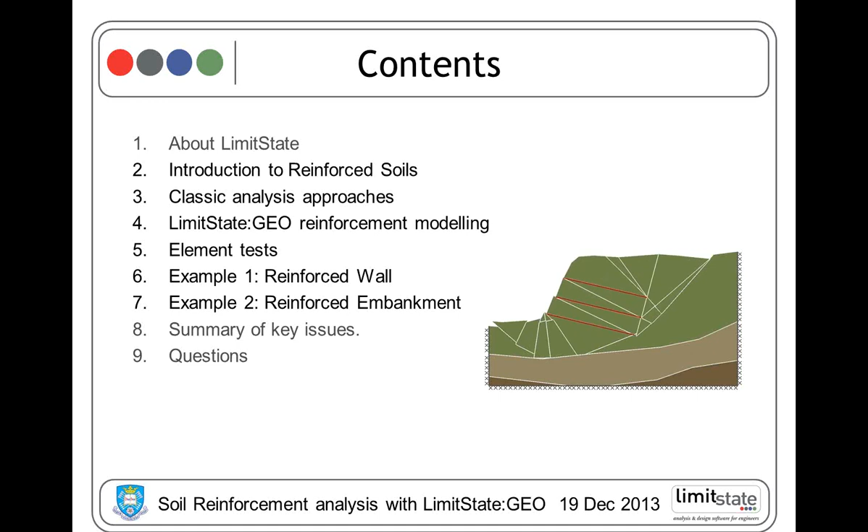So for those of you who are new to this webinar series, it's probably useful to give you some context of the software and the company Limit State. The University of Sheffield has been conducting research into limit state analysis and design and the use of optimization in civil engineering for almost 2 decades now. And Limit State was spun out from the university in 2006 with the aim of making this research available to industry.

Clearly, industry users want not only powerful tools but ease of use and support, which is exactly what Limit State can provide. Limit State also has sophisticated testing systems in place. That means every time the software is run, we run almost 1,000 tests automatically to make sure it still does what it's supposed to do.

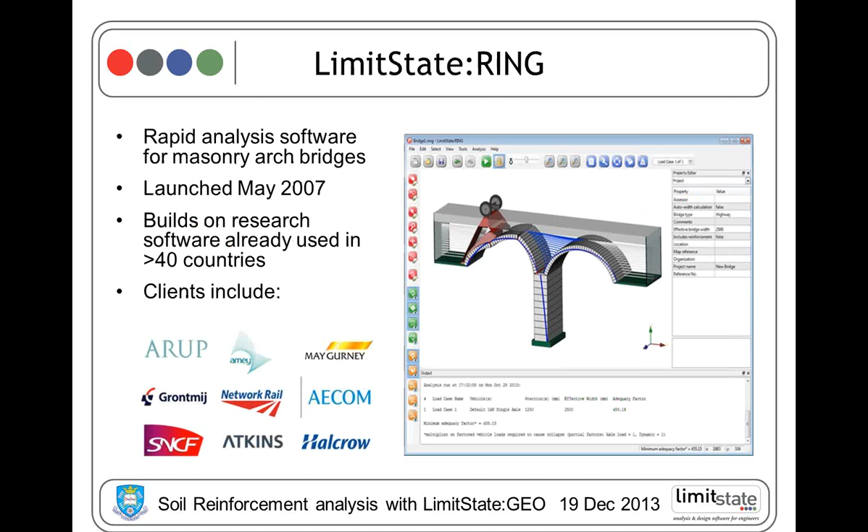The company has 2 products at present. First one is LimitState:RING, which is used for modeling masonry arches, and the second product is LimitState:GEO, which is the subject of this webinar.

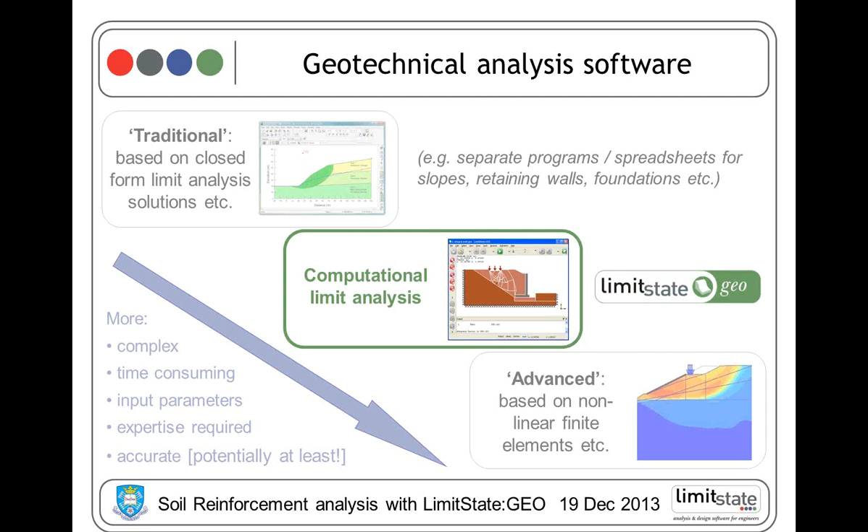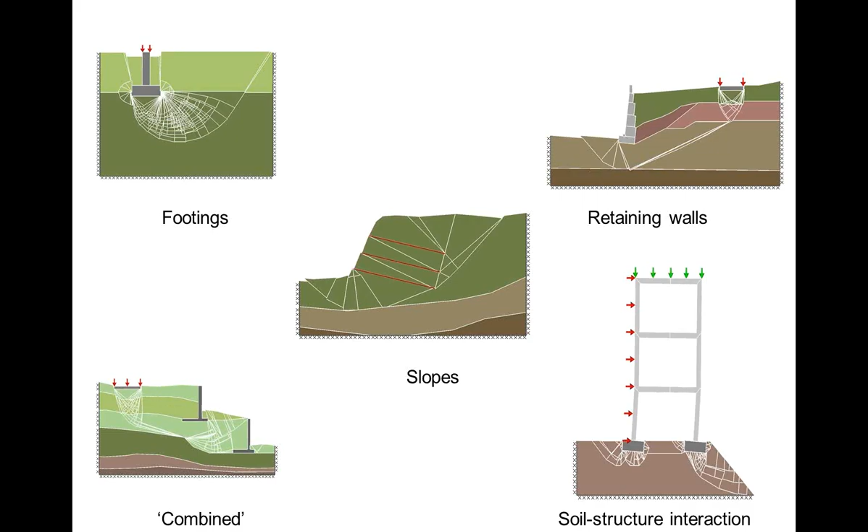Just a little bit of background to reinforced soils, to put in context how this is modeled in the software. Soil reinforcement can be considered to work by adding tensile strength to the soil. As we know, soil is fairly poor in tension, so it's a way of transmitting tensile stresses from one part of the soil body to another.

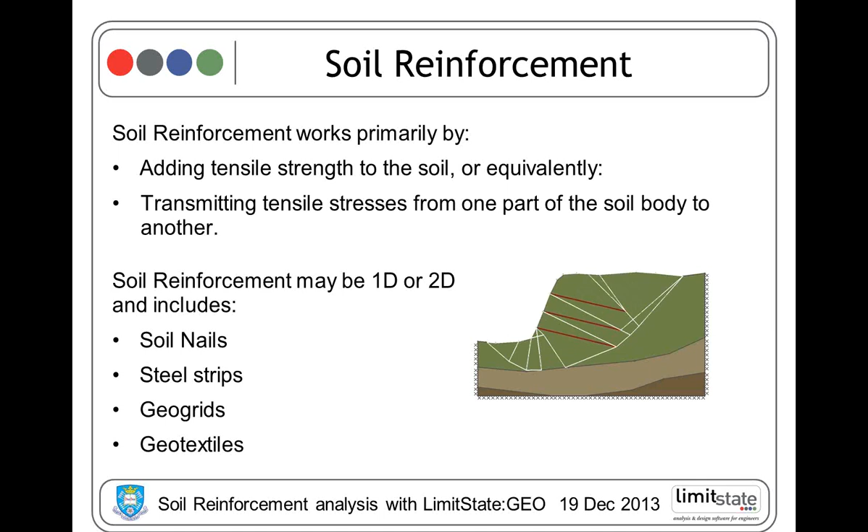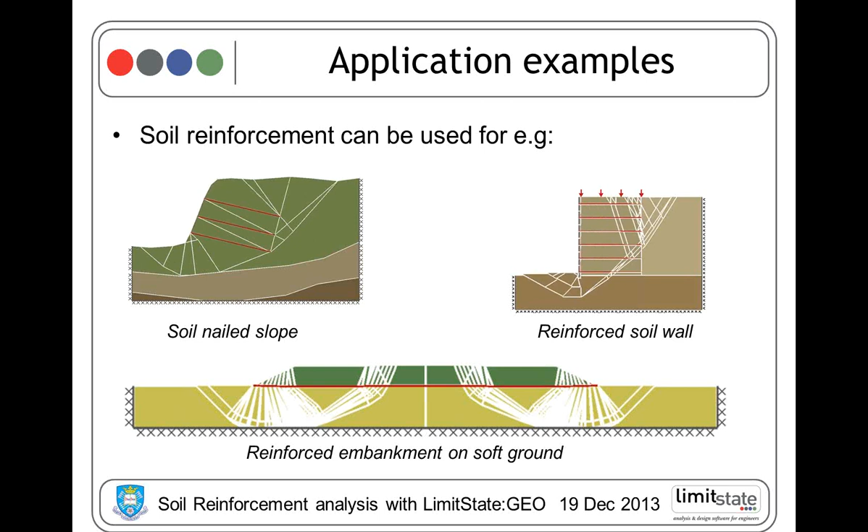So how are these types of problems analyzed by traditional classic approaches? We can use a number of methods, such as the method of slices for slope stability analysis, and we can try and apply that method to a reinforced slope.

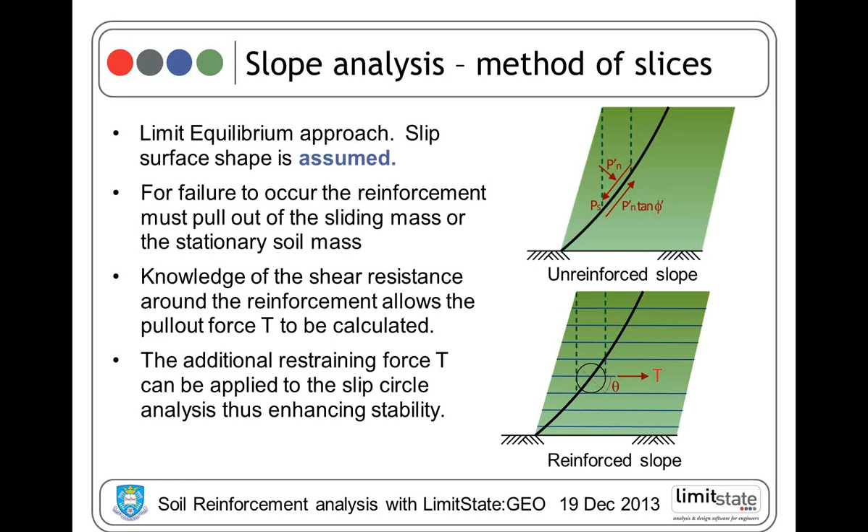An alternative method that's commonly used is one or two wedge analysis, where you're looking at a reinforced soil mass and consider a sliding wedge of soil. Again, if that sliding wedge or interface crosses the reinforcement, then in order for that wedge to slide, it's going to have to pull that reinforcement out. You can calculate that resistance and apply it to the sliding wedge, which again enhances the stability.

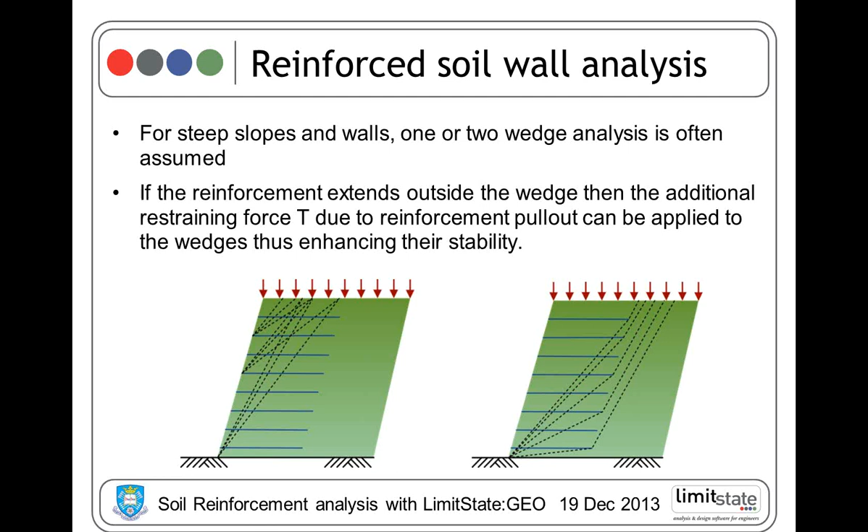So the key thing for us is, how is that restraining force calculated? At the basic level for undrained soils, if we have an element of reinforcement being pulled out through the soil, we might assume that the shear resistance on the interface is equal to alpha Cu, where alpha is an adhesion factor, which makes an allowance for the fact that sliding of the reinforcement on the soil is not going to give you the same shear resistance as sliding the soil on itself.

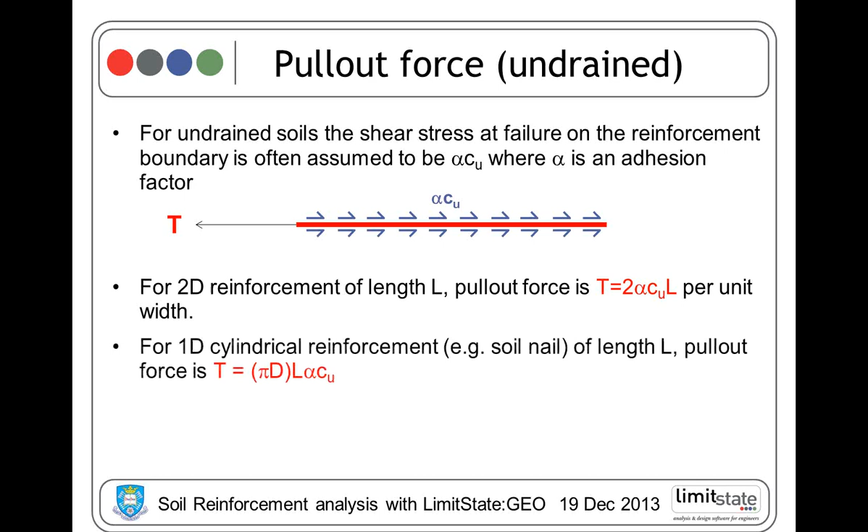For a 2D sheet-type reinforcement of length L, the pull-out force is 2 alpha CuL per unit width. The number 2 comes in because we've got shear top and bottom of the reinforcement surface. For one-dimensional reinforcement, say a cylinder, we take the circumference of the cylinder and again multiply that by alpha CuL to get the pull-out force.

So in both cases, if we were to write that in a very general form, we can say the pull-out force is equal to some constant Tc multiplied by the length of the reinforcement, and Tc depends on the geometry and interface characteristics.

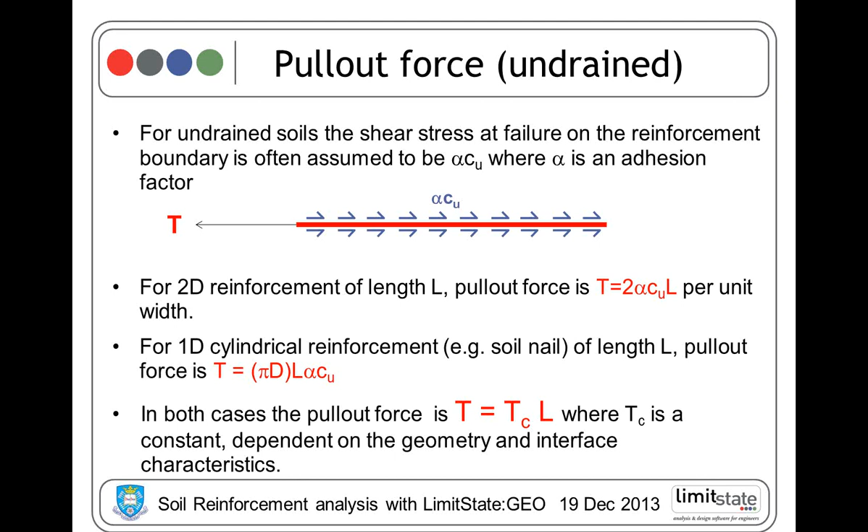For drained cases, it's pretty similar, except we've got a frictional interface, so instead of alpha Cu as the shear force mobilized on the interface, we've got alpha multiplied by the normal effective stress multiplied by tan of the angle of friction. Again, for two-dimensional reinforcement, we just multiply that up by the area, and for cylindrical reinforcement, we would multiply again by the circumference and the length.

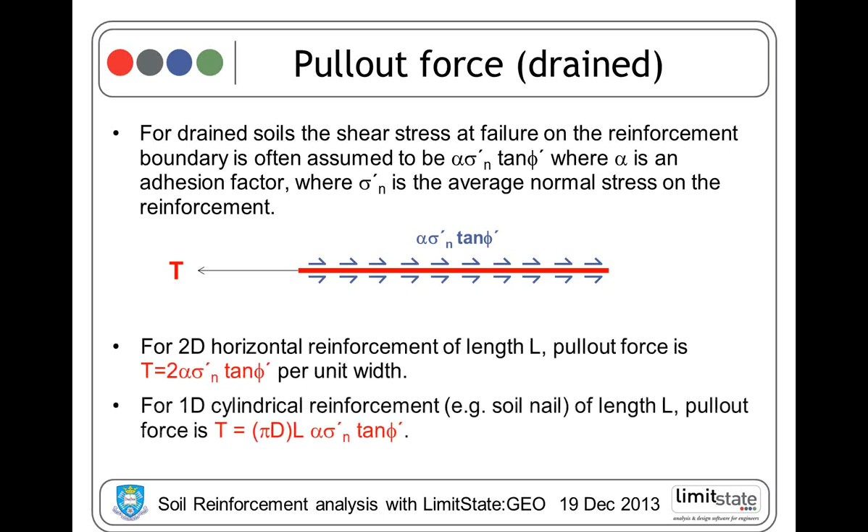Now, it's a little trickier for drained analysis because estimating the normal stress is a little more complicated. Quite often it's just assumed that normal stress is equal to the acting vertical stress, which may be calculated from simple statics, unit weight of the soil minus the pore pressure multiplied by the depth.

For a one-dimensional cylindrical reinforcement, this estimation becomes more complicated because the stresses are acting all the way around the cylinder, so they're not just vertical stresses, you've got horizontal stresses and so on. But there are various ways of trying to estimate what that would be, and that becomes a modification factor on the vertical stress.

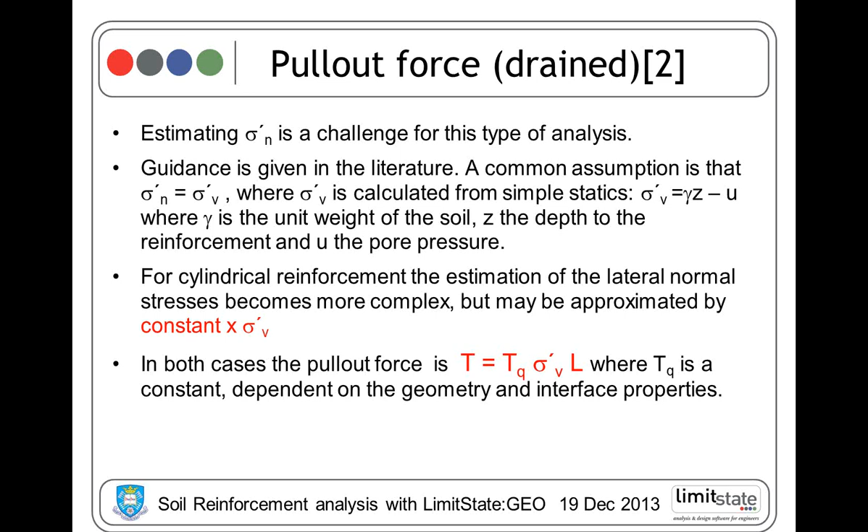So the upshot is that in many conventional analyses, the pull-out force is simply some constant, which we call TQ, multiplied by the vertical stress multiplied by length. These types of equations are essentially what we're using in LimitState:GEO to calculate the reinforcement interaction. We'll look at that in a little bit more detail.

Before we do that, it's probably worth recapping how LimitState:GEO works. If you haven't seen the explanation before, this will clarify how the LimitState:GEO software actually solves collapse problems. If you've attended any of the previous webinars, then this will be familiar to you.

The software uses a relatively new numerical technique called discontinuity layout optimization, which can be used to provide rigorous upper bound plasticity solutions. It's a direct way of analyzing the collapse state and came out of a 5-year research program carried out at the University of Sheffield, and the key publication which outlined the method was given in the Proceedings of the Royal Society in 2007, with a number of other publications since then looking at further developments of the method.

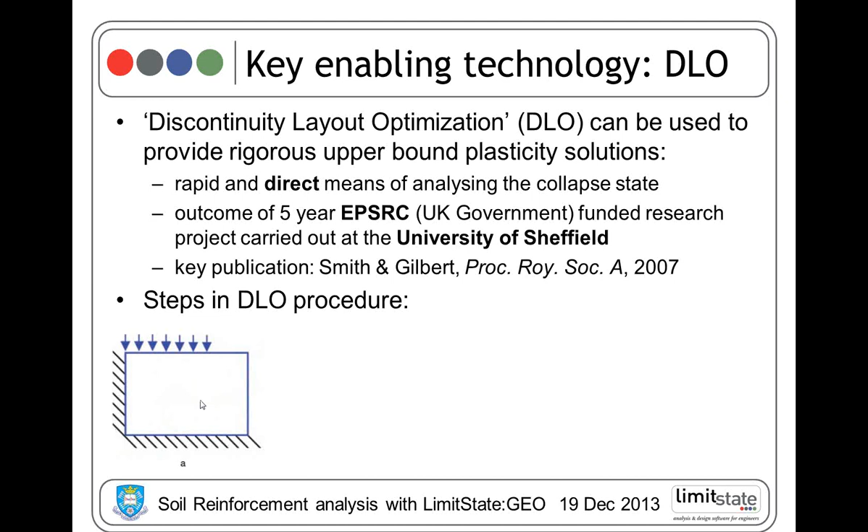In essence, it's quite simple to explain. What we do is, if we start with a problem which is the bearing capacity of a rectangular block of soil, so we have a load on the surface and a block of soil here. Instead of using elements as in the finite element method, we populate the problem domain with nodes. So here we've got 12 nodes. And then we connect every node to every other node with a potential slip line.

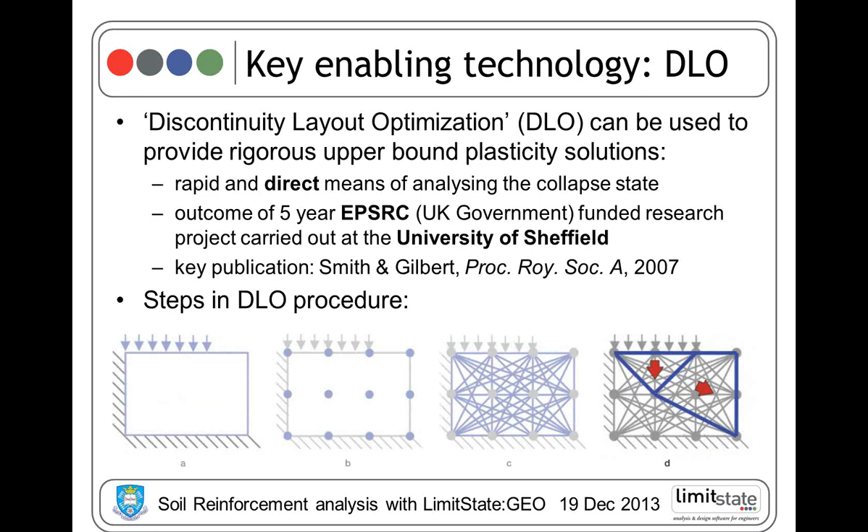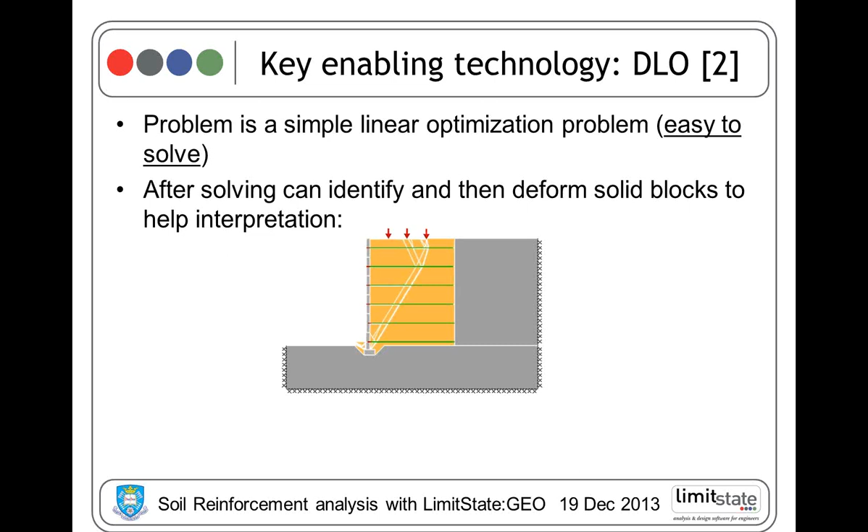The key point to bear in mind is that increasing the number of nodes in the problem allows more potential slip lines, and a more precise mechanism to be identified.

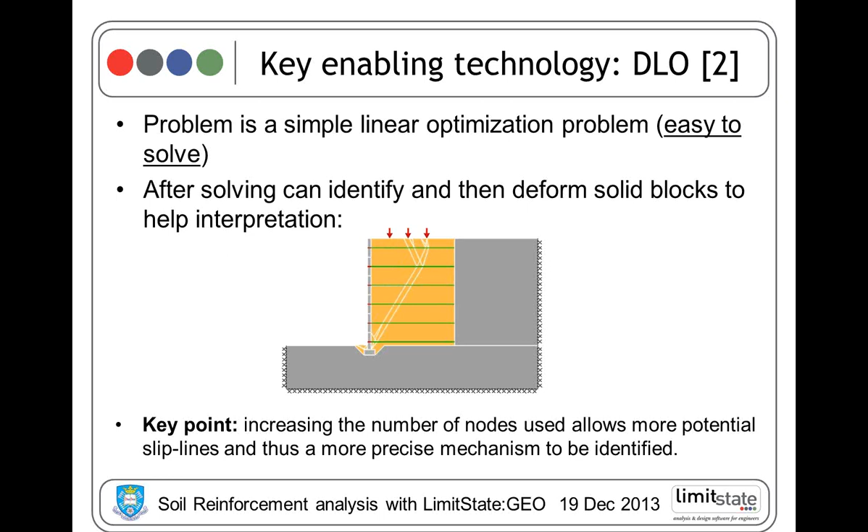So just picking up more detail about how this would work with soil reinforcement. If we're going to model reinforcement in the software, and this reinforcement in this diagram is represented by these green lines, then what we see in this collapse mechanism is that we have not just one sliding wedge, but several sliding wedges, and different relative movement between the soil and reinforcement in different places.

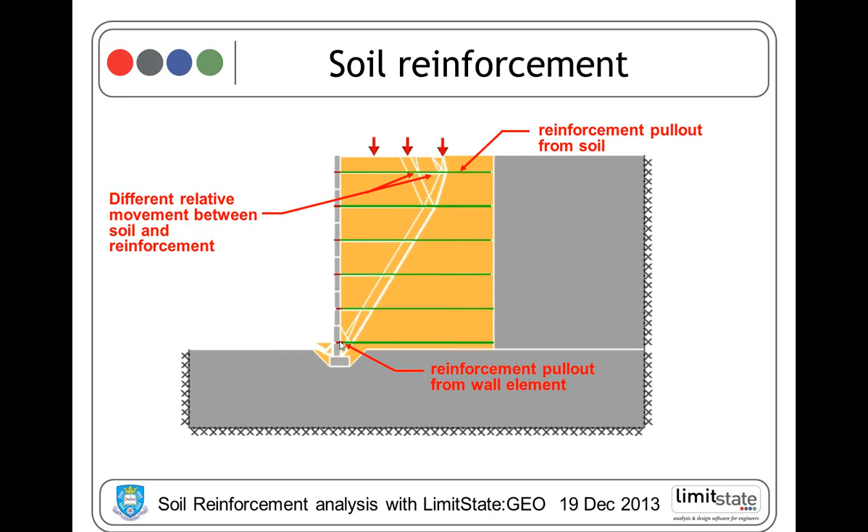It's not as clear-cut as in conventional analysis, where we have perhaps one length of reinforcement which is pulling out and another length of reinforcement staying embedded in a sliding mass. We could have relative movement right across the board, so we have to be able to model that. In this particular case, we've got more complicated behavior near the top of the mechanism. We have straightforward pull-out at the top here on the right, and at the base here we've actually got the reinforcement pulling out of a wall element. But we need to be able to capture all of this in a very general way.

So what the software does is it doesn't try to separate out lengths of reinforcement which are pulling out from lengths which are staying embedded in soil and are stationary. It just simply says what is the relative movement of the soil with the reinforcement at any local point. So here we've got an example of a wedge of soil sliding down past a piece of reinforcement. There could be many of these sliding in different ways relative to that reinforcement.

If we know the relative movement, we can calculate the limiting shear force applied to that reinforcement element over that short length, and carry that calculation through to a force taken by the reinforcement. That would be calculated using this equation, the second equation there, which is essentially using these parameters TC and TQ that I referred to earlier on. That allows us to produce a very general implementation of soil reinforcement interaction.

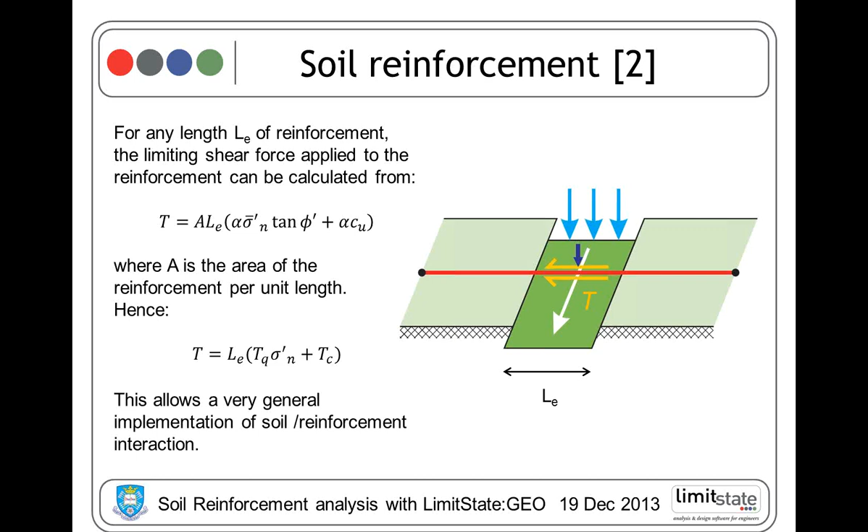So how does that work? Well, it's probably useful to look at some simple element tests to illustrate these principles in a bit more detail. So what I'm going to do here is escape from that software, and we're just going to run an example, run the software now, which is this one.

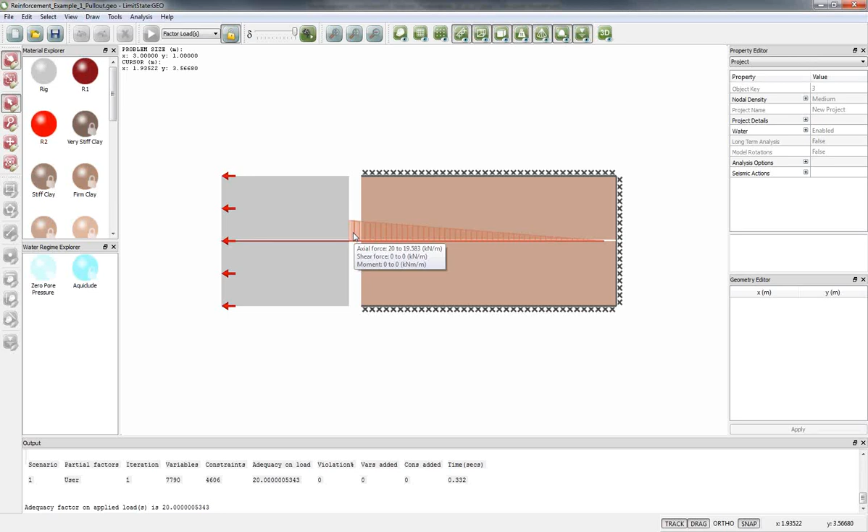The software can also be set up to plot axial force, shear force, or moment in any engineered element. For soil reinforcement, we're generally interested in the axial force. It's showing, as we'd expect, that the axial force is 0 at this end, and slowly builds up all the way to 20 at this end as the shear force from the soil is applied to the reinforcement along its length.

Now, just to be clear, let's run through a few more examples. I'll change the property of that reinforced element. As I said, I can access it by clicking on it directly, but it's also defined by this material R2 here, so I can click on that material directly and see its property there, which is 10.

So if I increase its pull-out factor to 20, then of course we would expect the pull-out force to go up to 40. It's 2 meters long as before, so it's 2 times 20. And as we expect, we get 40.

I'll increase its pull-out force to 100 now. So we'd expect to get an answer of 200. We in fact get an answer of 120. The reason for that is, of course, that the engineered element cannot pull out with a greater force than can be sustained in shear by the surrounding soil.

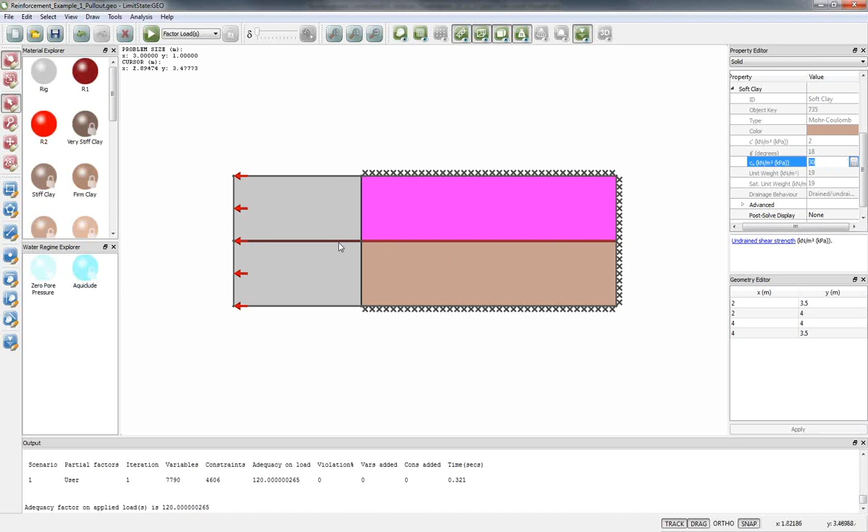If I click on this block of soil, the properties appear here, and we have a material there called soft clay, and that clay has an undrained shear strength of 30. So it's not possible for that reinforcement to pull out with a force greater than the resistance that clay could provide if that reinforcement was a sheet. So it's limited by that value of 30 multiplied by the length 2 and multiplied by 2 because we could have shear top and bottom. So there is a limit there, but generally you will be setting this value lower than for one-dimensional reinforcement, lower than an equivalent sheet would be.

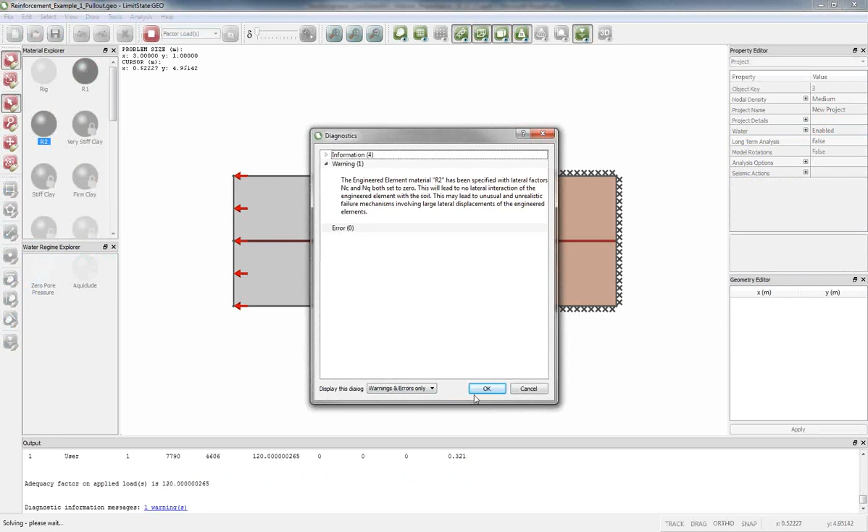So I'll change that back to 10 and we'll run that. So we get back to 20. The other thing to say is, of course, that if the reinforcement has a strength lower than 20, then it will actually rupture. At the moment, we've set the rupture strength of this reinforcement to 1 times 10 to the 30, which is effectively infinity.

If I set that to 10, we should find that the reinforcement will fail in rupture before it can mobilize the full shear resistance. And here you can see that we've got a result of 10 now, and that this shear force is building up to a maximum of 10 at this point. The way that's represented in the animation is basically the reinforcement just stretches.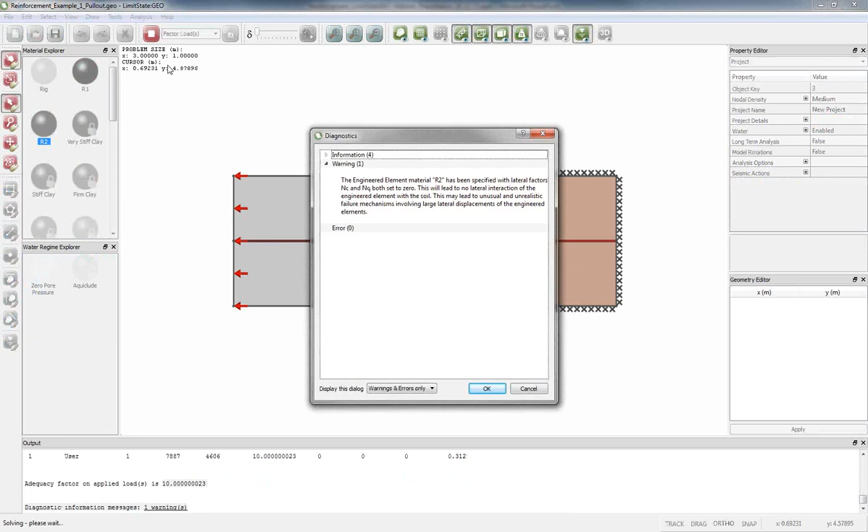Whereas previously, if we looked at the animation, if I change this strength back to something very large, you can see that the reinforcement pulls out of the soil at this end. So in the animation, it will indicate whether you're getting pull out, so you can see a gap forming at this end, or whether we're getting rupture, which is effectively represented by the reinforcement stretching in the animation. So that's a representation of the pull-out force.

I'll just touch on one other property of these engineered elements, which are not typically used in classic analysis. If you have a one-dimensional element such as a soil nail, and the soil is moving past the nail laterally, then there might be a lateral resistance, in the same way that you get a lateral resistance of a pile. So you can specify that in this particular problem.

If I click on this item here, we have what's called a lateral factor, which effectively works the same way as the pull-out factors, except it responds to lateral force. So this is basically saying that for soil to move past this reinforcement laterally requires a force of 25 kilonewtons per meter length of the reinforcement.

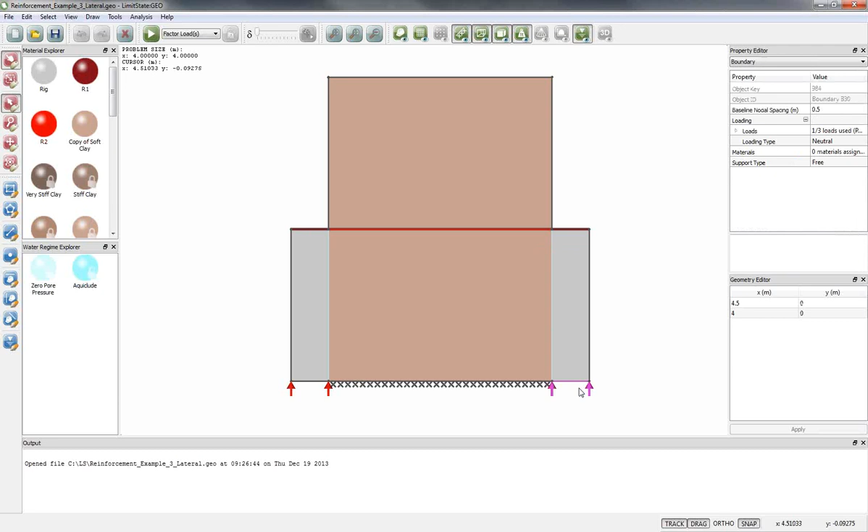This element test here is simply set up as a little jig with some rigid elements to apply the forces, and we're asking the software what do we have to multiply these unit forces by to cause collapse. So we run that problem and we get an answer of 75 in this particular case.

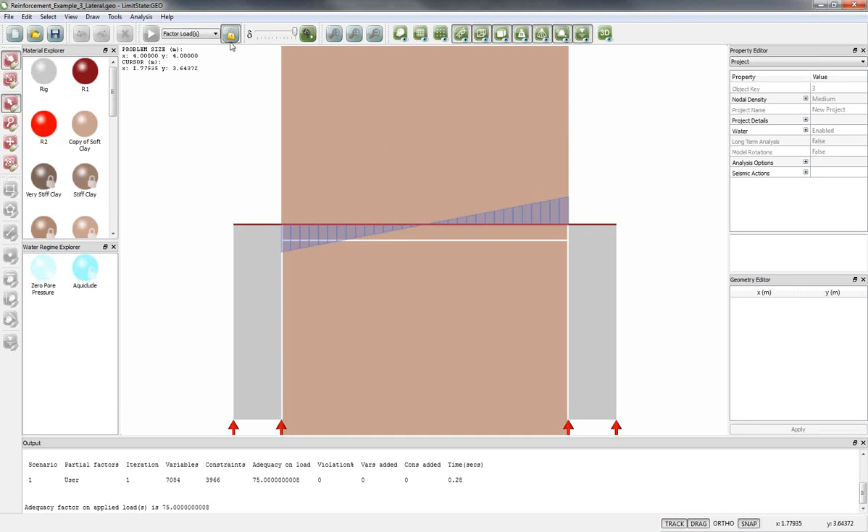This element is now moving sideways through the soil. We're plotting shear force in the element here, running from 37.5, minus 37.5, to 37.5 at the other side, which is basically equivalent to that overall force of 75. And why is it 75? Well, if we look at the reinforcement, it's modeled from coordinate x 4 to 1, so that's 3 meters long, and we had specified a lateral resistance of 25.

So it is possible to model lateral resistance. It's not necessarily typically used in conventional analysis, so you can simply set those values to 0 to eliminate that process. We actually recommend setting that to a very small number like 0.1, simply to stop occasional anomalous results where if the reinforcement isn't asked to do anything and has no lateral resistance, it could simply float out of the soil. A very small number there will just prevent that happening.

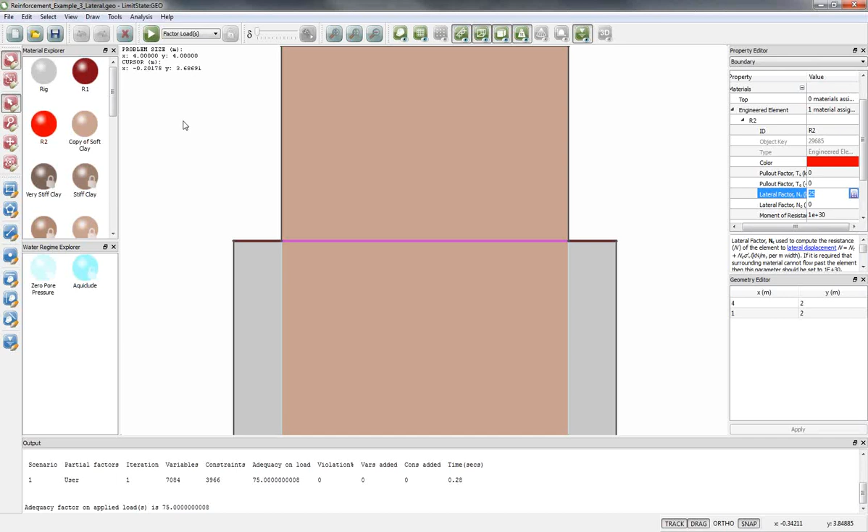So that's the element test. So how do we actually apply that to an actual problem? I'm going to jump back to our PowerPoint presentation.

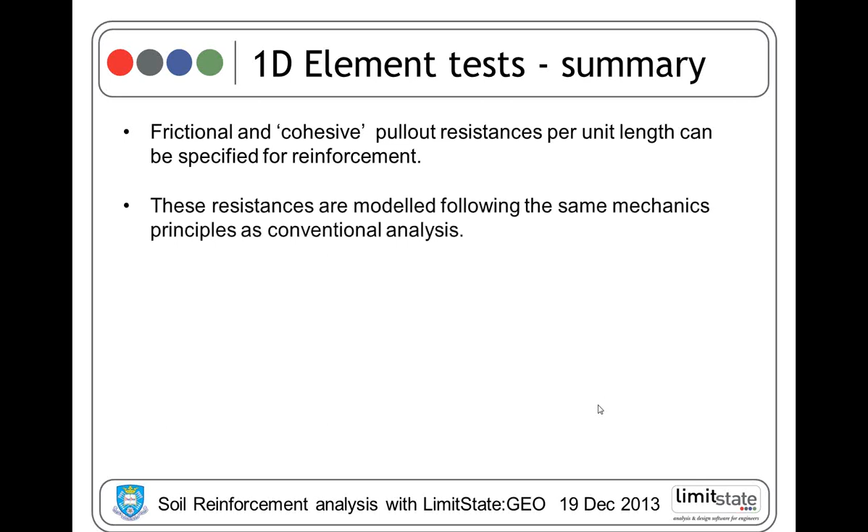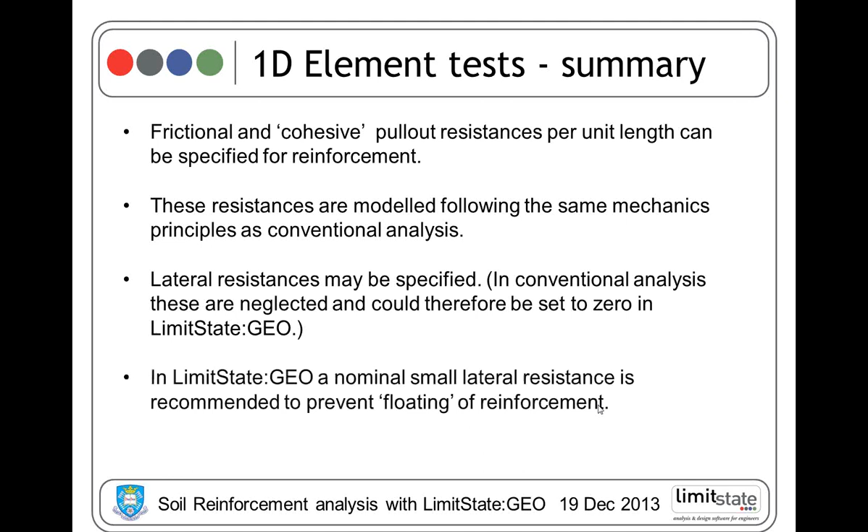Just a quick summary of what we've covered. We can model frictional and cohesive pull-out resistances per unit length. We looked primarily at the cohesive ones, but the frictional properties can be put in and work in conjunction with the nominal vertical stress, following pretty much the same mechanics found in many conventional analysis techniques. We can model lateral resistances, but you may wish to set those to 0, or to a very small value just to prevent floating the reinforcement, and we can specify tensile rupture strengths for reinforcement.

So we'll jump back to the software and that model. Here we've got the limit state model of that diagram I just showed you. If we click anywhere here, we get the soil - you can see it's got a C dashed of 2.5 and a phi dashed of 26 degrees. And the reinforcement nail, if I click on that, you can see it's got a pull-out factor of 1.96 for the TC value, and TQ is 0.383.

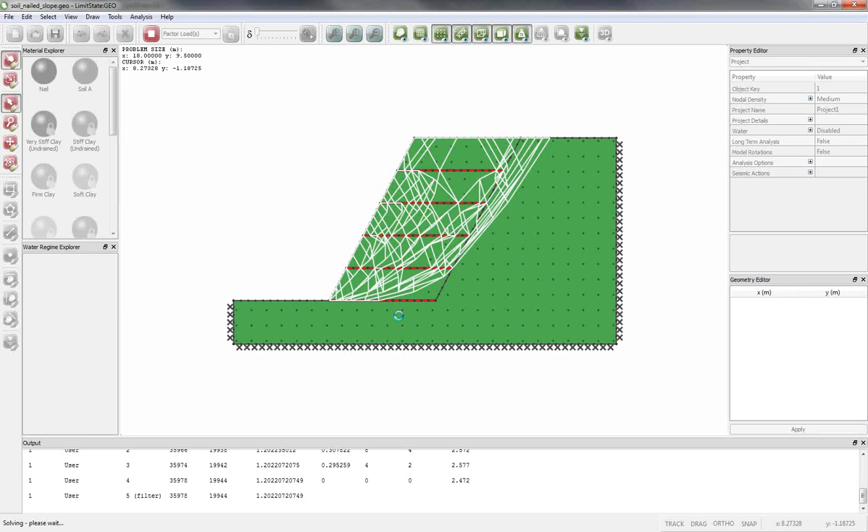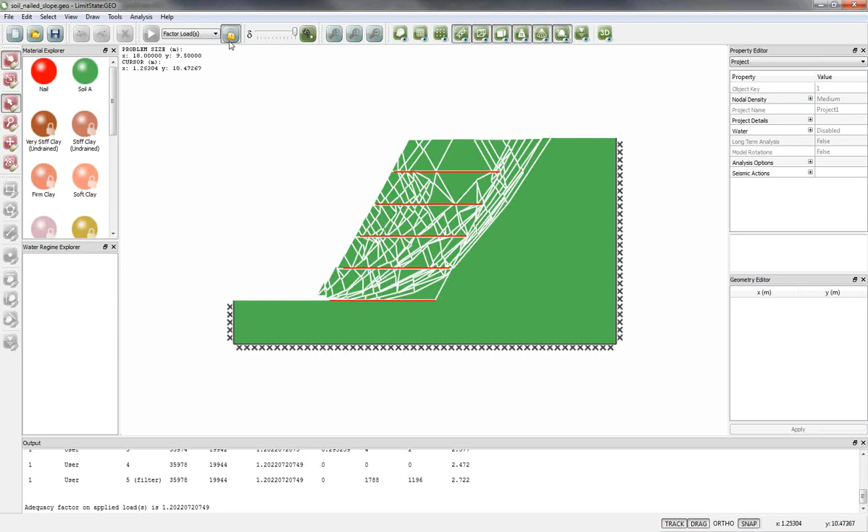So if I run that analysis, I get a particular collapse mode, and you can see there's a lot of sliding wedges in between the reinforcement, but the overall shape is pretty much like a two-wedge analysis - the software is finding the critical collapse mode in that case. We can do things like changing the length of the nails, so I can shorten these down, perhaps to see what effect that has.

And if I solve that, we'll get a somewhat different collapse mode.

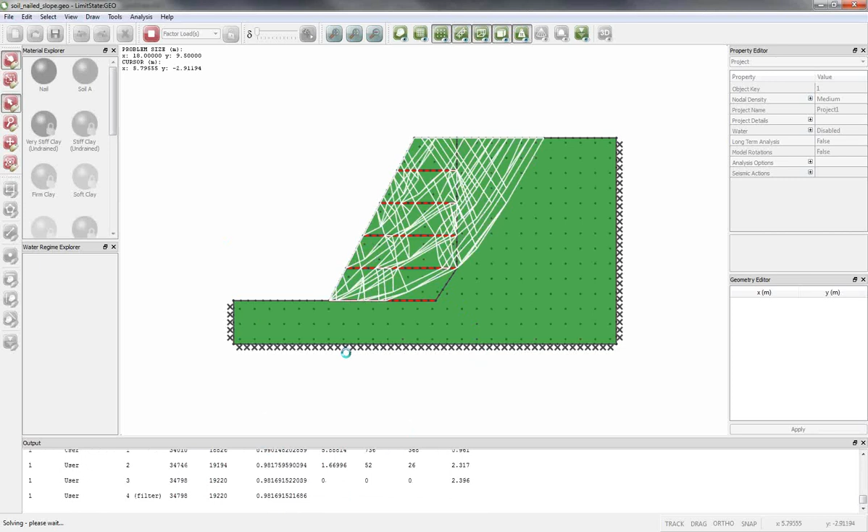What I'm doing is asking the software for an ultimate limit state analysis process, and we've gone into this in more detail in previous webinars. Essentially we're asking the software, what do I have to do to this system to cause collapse? We can ask that in two ways: how much do I have to increase an existing load in the system to cause collapse, or how much do I have to reduce the strength of the soil to cause collapse.

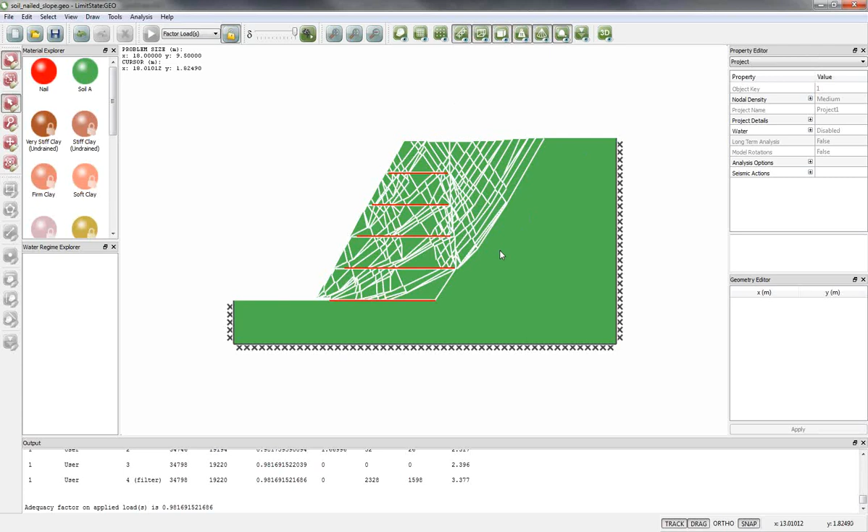In this case, we're asking how much do I have to increase the unit weight of the soil by to cause collapse. What the software is saying is you have to multiply the unit weight of the soil by 0.98 in this case to get a collapse mode, which means this system is pretty much on the point of collapse. Before I shortened those soil nails, we had a factor of 1.2, meaning we had to multiply the unit weight of the soil by 1.2 to cause collapse.

Further details are in the manual on how you define what you want the software to scale to cause collapse, but you can choose any load or any combination of loads, or specify that you want strength factoring.

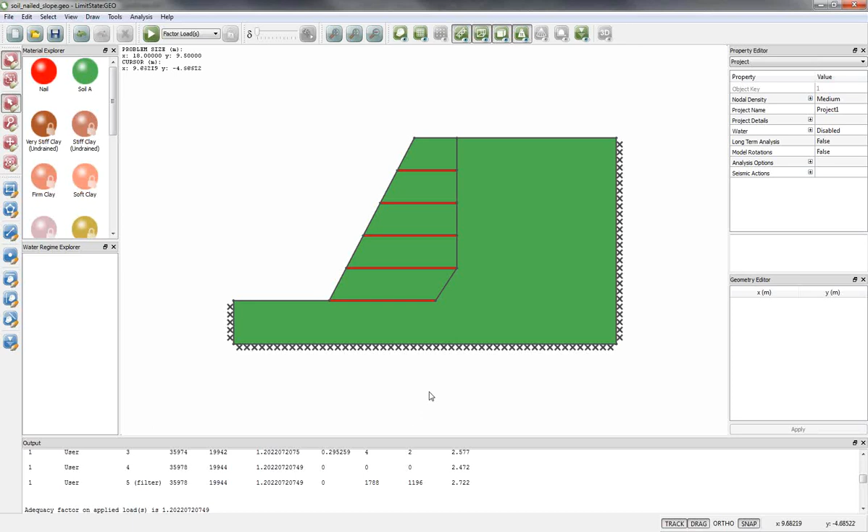So that's a brief look at modeling the soil nails and how they interact, and how that interaction changes, but certainly it increases the stability of the system.

If we jump back to the presentation, in that paper by Clarke et al., first of all we looked at modeling, comparing the DLO analysis, or limit state geoanalysis, with a two-wedge analysis. First, just to check that it did work validly, the DLO analysis was set up so it was forced only to model two wedges. Normally, as you've just seen, it will model hundreds of wedges, but you can force it to only model two. That was compared with a classic hand calculation using two-wedge analysis.

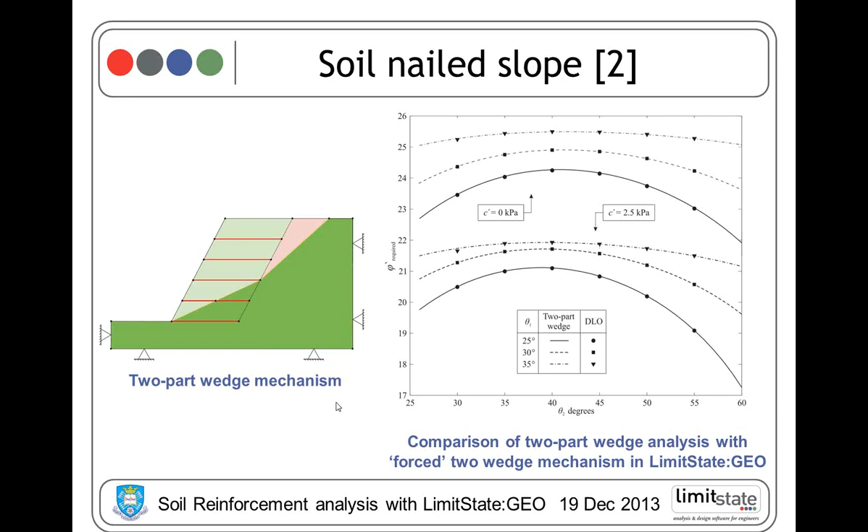This graph shows a comparison. The curves are from the traditional two-wedge analysis hand calculation. The individual data points are from the DLO analysis, and you can see they exactly match up. So that indicates the reinforcement modeling is doing exactly what it should do.

If you then allow the software to pick whatever collapse mechanism it wants, what you find is, comparing this first graph, which shows the required friction angle for a given length of reinforcement just to avoid collapse, this is what a two-wedge analysis would give you. The software is finding more critical mechanisms, so it's saying this is a bit over-optimistic, and really you need a slightly stronger soil to prevent a more refined, more critical collapse mechanism than the simple two-wedge approach.

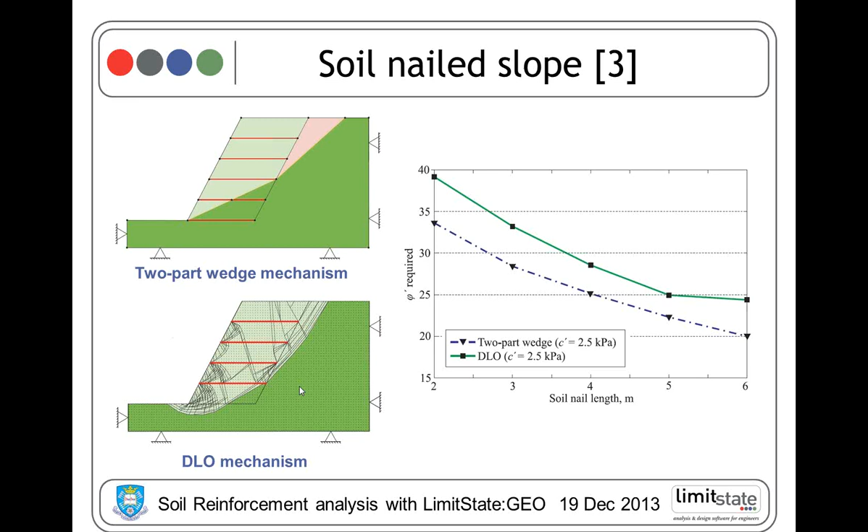So what the software can do is essentially seek out and find the most critical collapse mechanism. It's not restricted to two-wedge or one-wedge or whatever. It will find whatever mechanism it can construct out of slip lines joining the nodes you've specified. You can see in this diagram there are a very large number of nodes, so the software can pick out some very fine mechanisms. It will find internal failure if that's critical, external failure if that's critical, or any combination.

So in summary, if we're modeling one-dimensional reinforcement like soil nails, the implementation in the software allows soil to flow past the reinforcement. It doesn't behave like just putting a sheet in the soil. Soil can flow past the reinforcement, but the reinforcement can still take some of the tensile forces through the soil. It's been calibrated against two-wedge analysis, and the recommended approach to modeling 1D reinforcement is to use engineered elements, calculating Tc and Tq pull-out values and entering those.

You may specify lateral coefficients if you wish, but they may be set close to 0, and you would specify a tensile rupture strength as appropriate. Generally, as we showed earlier, you can set boundary materials above and below the element, but they were not set in this particular case, so normally we just leave those empty. That's modeling 1D reinforcement, and the way the formulation works, as I've said, is that it allows the soil to flow past the reinforcement.

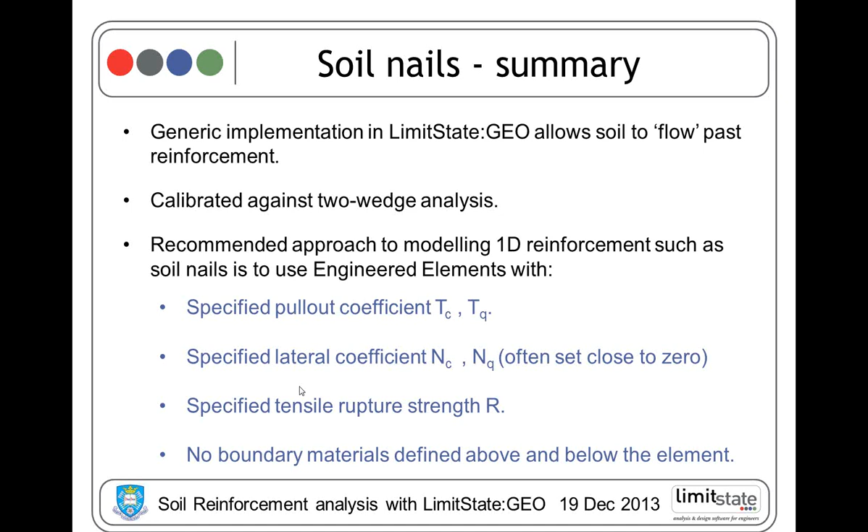If we're going to model two-dimensional planar reinforcement, like sheets of geotextiles or geogrids, generally the soil is not going to flow through the reinforcement, and we are more concerned that we might have sliding above the reinforcement or below, and that may be the same amount of sliding above and below, or it may be different. So we take a slightly different strategy in this case.

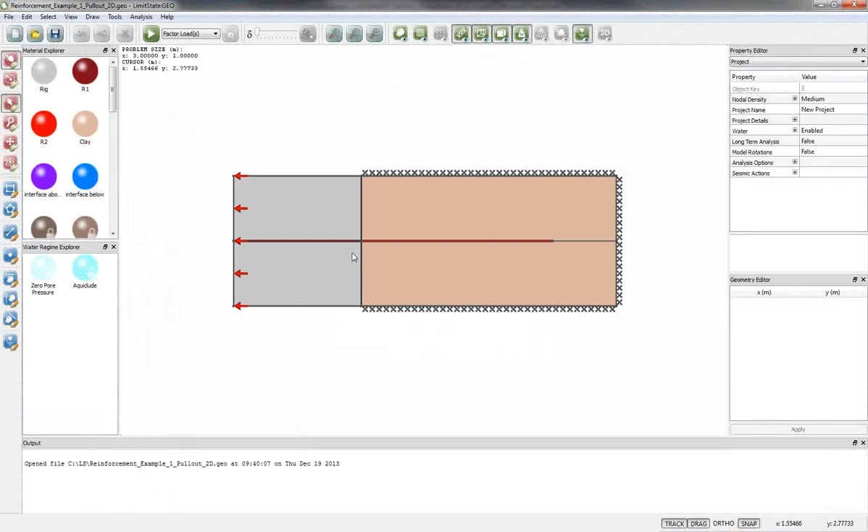I'll jump back to the software to look at how we deal with that particular case. Here we have an example very similar to the previous one. We've got the same block mechanism on the left to allow us to pull out this length of reinforcement. This time this reinforcement has a length of 1.5 meters.

We have this engineered element, and this time I'm setting the pull-out factor for TC to be a very high number, effectively infinity. I can set both TC and TQ to infinity, or just TC, it doesn't matter, they will override effectively to infinity. I'm setting the lateral factor to infinity, and normally we would set the moment of resistance of the material to 0, meaning we're modeling it as a very flexible material with no bending moments, free to bend as it likes. The rupture strength here we're setting as infinity for the moment. What we want for this engineered element is, if we're modeling it as a sheet, the fact we've set the lateral factor to infinity prevents soil flowing through it.

The fact that we set the pull-out factor essentially locks it to its top and bottom interface materials, and so we allow all the interface action to occur through those.

At the moment we don't have any material assigned, so I'm going to assign a material that relates to the surrounding soil. This surrounding soil is a clay soil, with an undrained shear strength of 50.

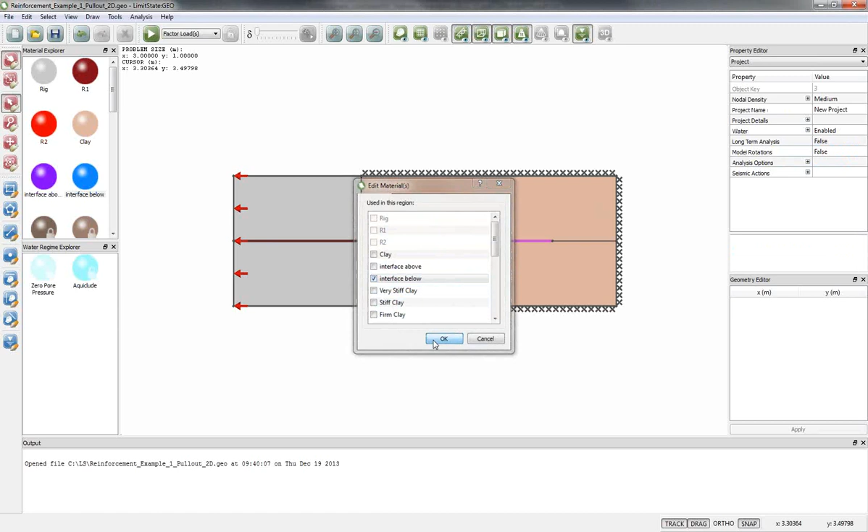So I'm going to click on this bottom element and assign the interface below material. If I zoom in on the element, you can hopefully see it's got these 3 colors on it: the interface above material, the element itself, and the interface below.

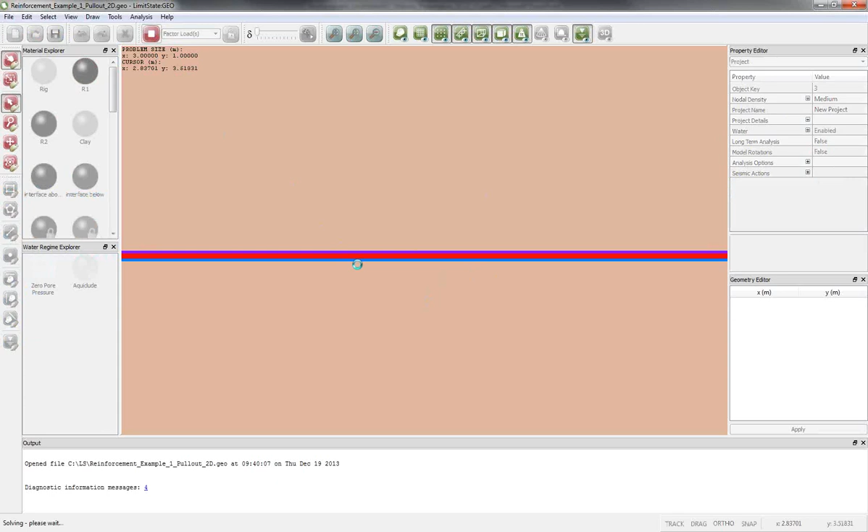What we've done by setting the pull-out resistance of the element to infinity is we've locked it to those interfaces effectively. So when I run that problem, the reinforcement is going to slide on those interfaces and be pulled out as before.

This time I'm getting an axial force of 112.5. Now the original clay had a strength of 50, and I've applied factors of 0.9 above and 0.6 below, so on average that's 0.75. Effectively per unit length I've got 37.5 applied to that.

And the length of the reinforcement is 1.5. So if we factor all those numbers in together, then we end up with this load capacity of 112.5.

It's perhaps easier if I were to set these values to say 0.5 and 0.5 above and below to a half. So effectively we've got half the interface friction above and below, and we run that problem.

So if I have half the interface friction above and below, I've got 25 above, 25 below, and a length of 1.5. So all multiplied up comes up to 75 for my pull-out load.

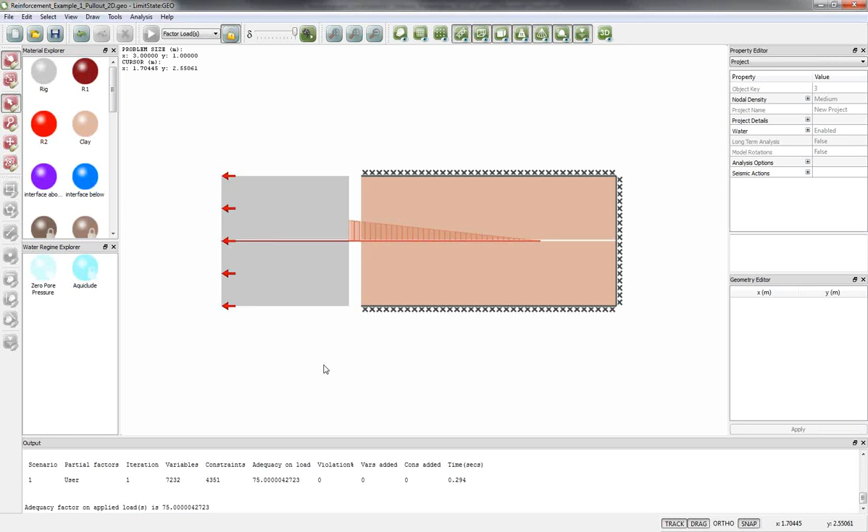So we can set the planar reinforcement interaction in a different way. This way, the rupture strength still behaves as normal. If I set the rupture strength to say 24 for this material, then of course it will rupture at a strength of 24 rather than 75 in this particular case.

So I get a result of 24. So the software will allow that rupture to occur.

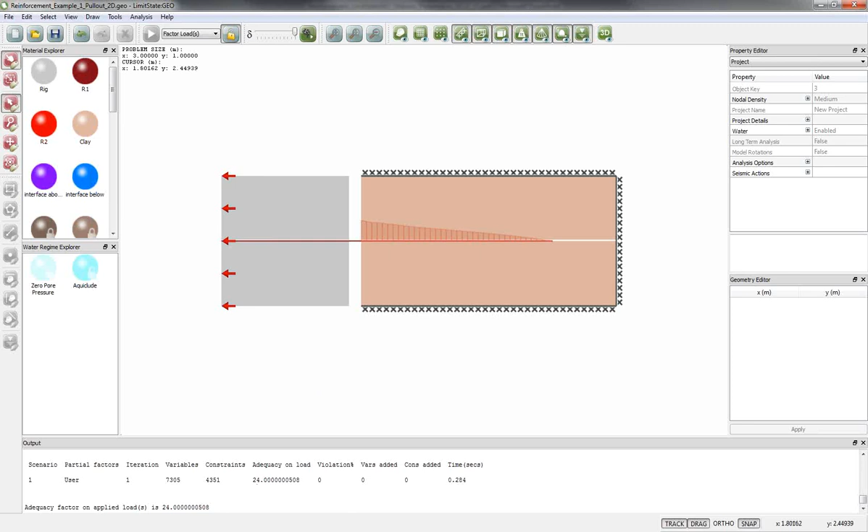So that's a brief overview of modeling planar reinforcement, and if we jump back to the PowerPoint.

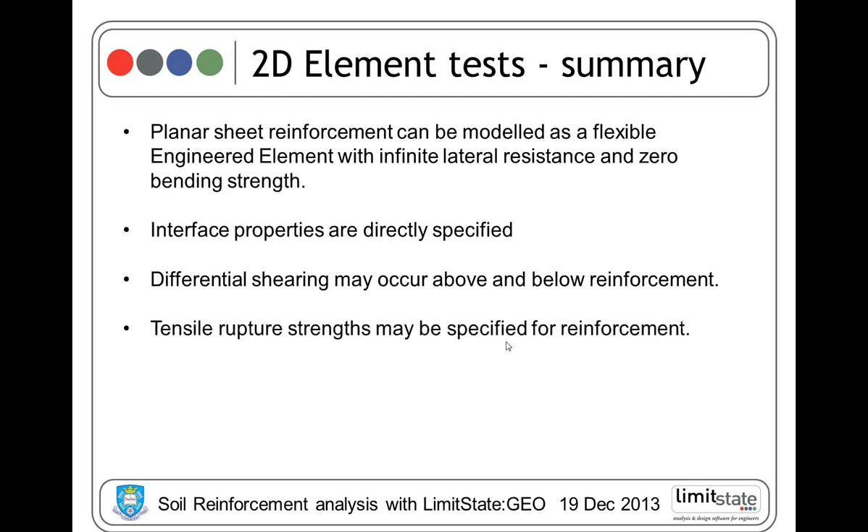In summary, we can model it as a flexible engineered element with infinite lateral resistance and zero bending strength, and we just specify the interface properties directly. And that allows differential shearing above and below the reinforcement. And again, we can specify tensile rupture strengths.

So we'll finish off this webinar by looking at a reinforced embankment. Often if you're going to build an embankment over soft soil, you'd use reinforcement between the embankment and the soft soil. And there might be a whole range of questions: What slope angle can you have on the embankment? How strong should the embankment soil be? How high can you build the embankment? What's the required rupture strength for the reinforcement?

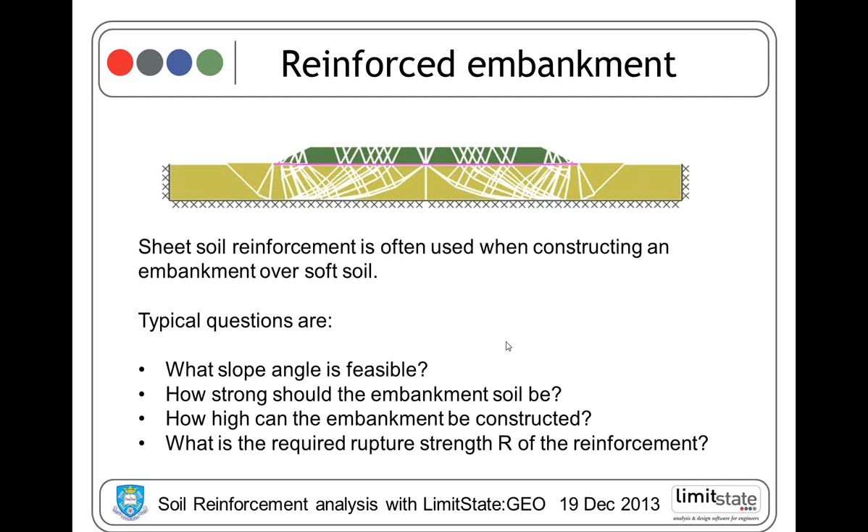So we'll just jump to the software again and look at an embankment model. So here we're modeling half an embankment. We've got a symmetry line down the middle. We're modeling the embankment material as a granular frictional material, friction angle 32, C-1/2, and we're modeling the base soil

here as soft soil. It's got an undrained shear strength of 16. The geotextile itself, we're modeling all those coefficients, lateral and pull-out forces, as infinite effectively, so they're locking themselves to those interface properties, zero moment of resistance and a rupture strength of 25 to begin with.

And this element itself has top and bottom materials. The top boundary is defined as having an alpha factor of 0.8, so that's 0.8 of the strength of its parent material, which is the overlying sand. And the bottom boundary, again, we've got 0.8 of its parent material, which is the underlying soft soil.

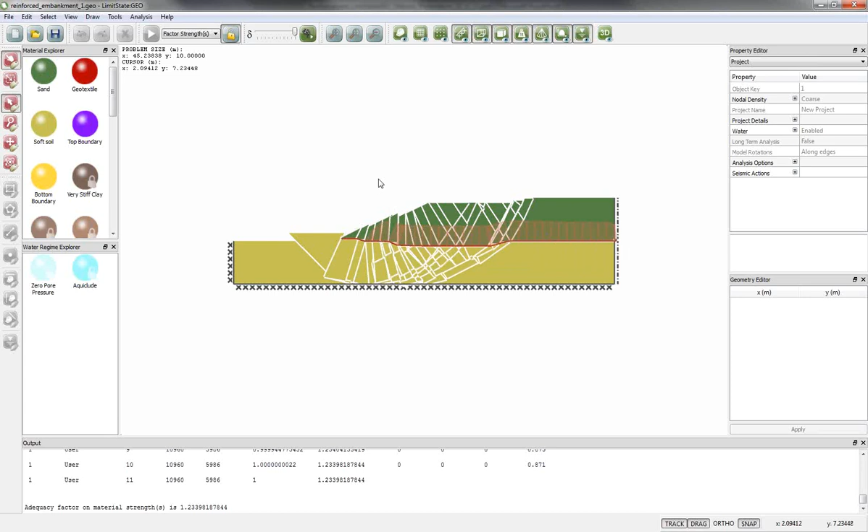And we've compared this with sort of slip circle method of slices approaches, and we get very similar answers in this case. But what the software is able to do is obviously pick up different types of failure modes.

So if, for example, we made the rupture strength of the reinforcement much higher, put that to 250, really effectively way beyond its failure, then we can get different failure modes. So by making that much stronger, what we find is that once the software has found the critical failure mode for

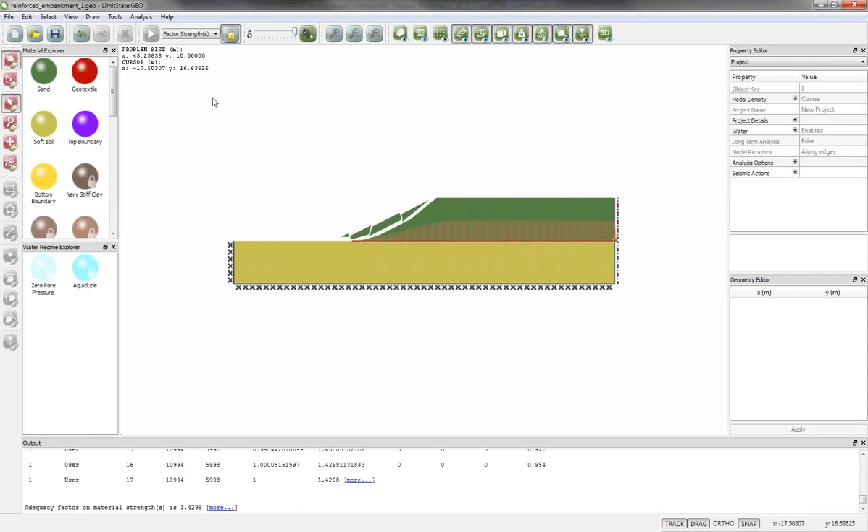factoring strength, we just get a simple slope failure in the embankment. So the software can identify those failure modes.

But additionally, supposing the soft soil was even softer, just for the purpose of illustration, I'll half that strength. The software again can find different failure modes.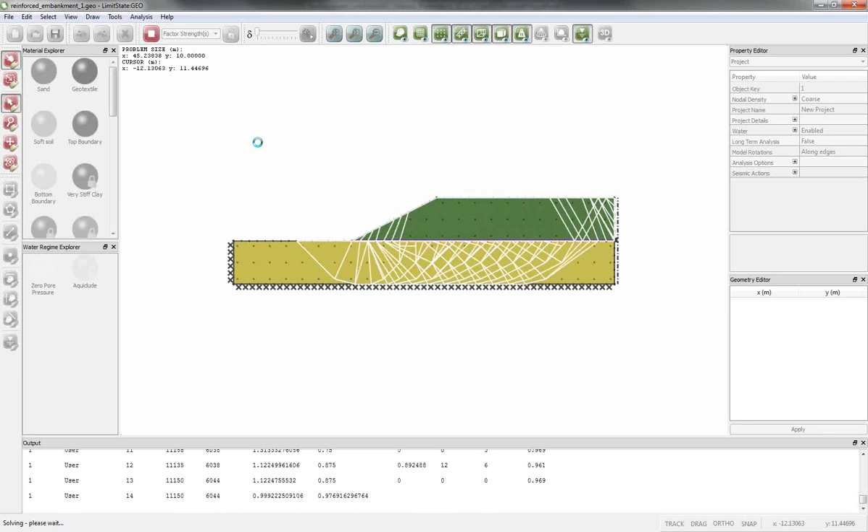So in this case, it's finding a collapse mode, which is effectively squeezing the underlying clay, and the embankment is in effect snapping itself down its middle and rotating into that clay, as we'll hopefully see in the animation. So again, hopefully this shows the power of the software to find the critical collapse mechanism. It's not restricted to predefined modes.

And generally it's finding more critical mechanisms that a slip circle method would find.

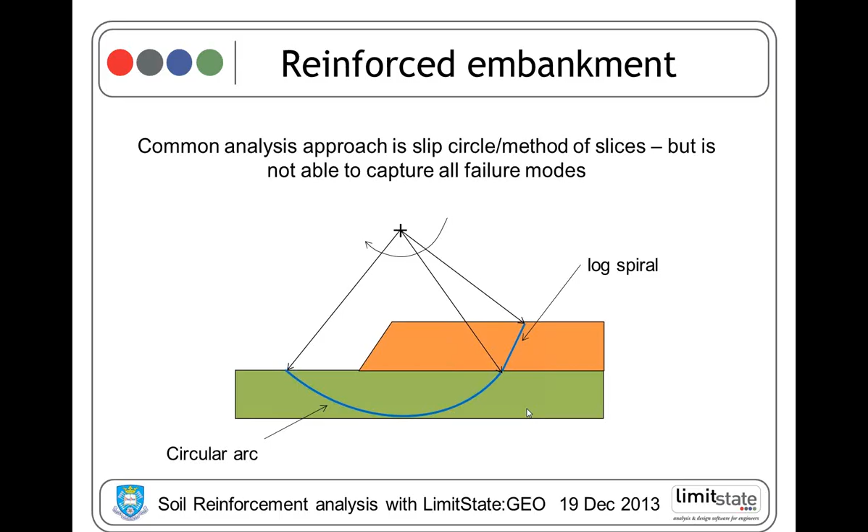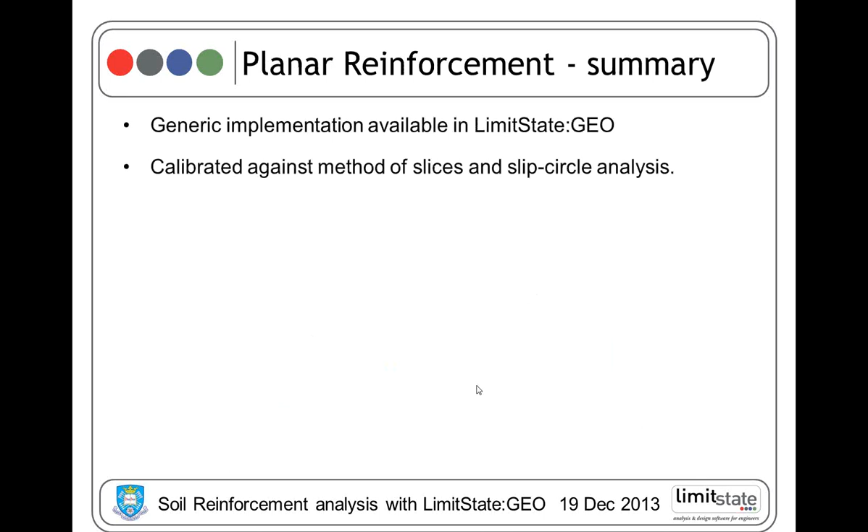So to wrap up, in terms of planar reinforcement, we've got a generic implementation available in the software. We've compared it against method of slices and slip circle analysis, and the recommended approach is to set the pull-out and lateral coefficients to infinity, specify tensile rupture strength, and define the use of boundary materials above and below to effectively implement the alpha interface factors.

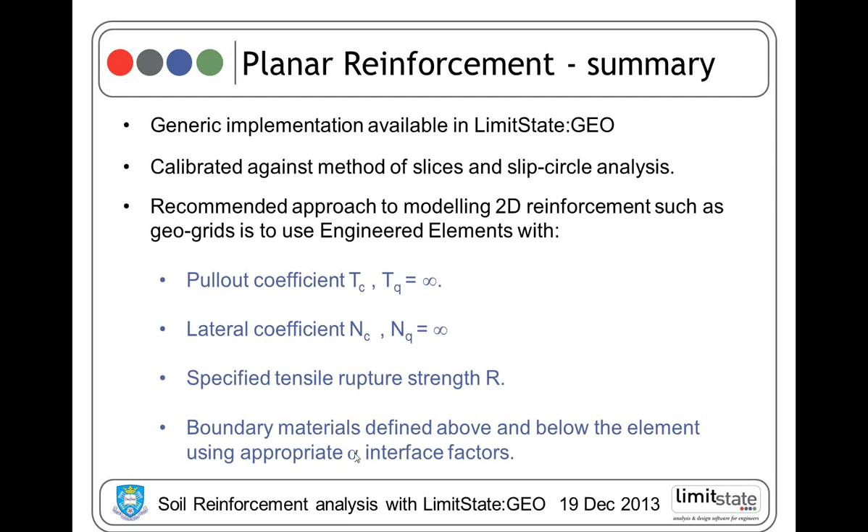So that pretty much wraps up this webinar. To summarize, hopefully you can see that we've used reinforcement modeling in LimitState:GEO using the same mechanics as conventional methods, such as a two-wedge method, but effectively we can model thousands of wedges. There's no need to separately consider internal-external failure, pull-out lengths, or reinforcement rupture. Those are all captured in the one analysis, and the method automatically searches all possible failure modes every time you solve.

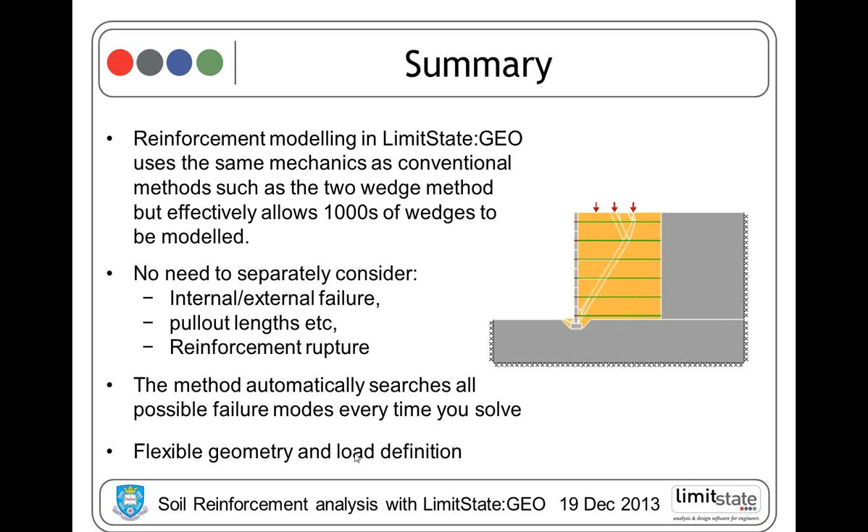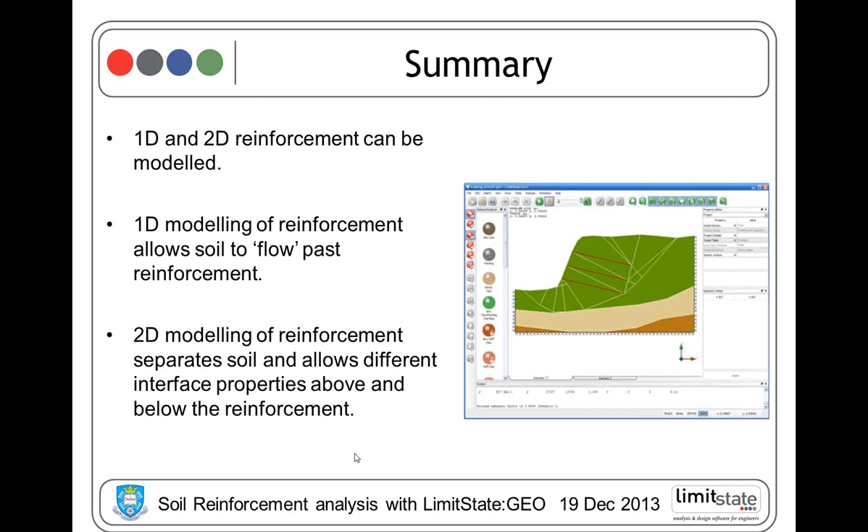And we have a flexible geometry and load definition. We can model 1D or 2D reinforcement, and with a 1D representation, soil can flow past reinforcement, which means that things like soil nails are not being modeled as sheets in the model, whereas in 2D we can model them as sheets, but we can allow differential movement of soil above and below if required. So that wraps it all up.

Okay, if I've read that question right, I can illustrate that using this model here. Generally if reinforcement is meeting an external boundary, there is no fixity there. You have to put that in specially. So what I've done here, it's actually hidden away, but if I zoom in, I've attached this reinforcement here to another length of reinforcement here. Wherever reinforcement joins, they are locked together, and this bit of reinforcement is essentially attached to this rigid block of material. So that is effectively giving me fixity of this length of reinforcement at this point, because it's joined to this, which is rigidly fixed to this block. And this block itself, you can't see it, but there's a fixed boundary here. So this is rigidly fixed. And what I've done is put a frictionless interface here in place, so that effectively emulates a symmetry boundary condition, which is what is presented above and below there. So I hope I've answered that question as it was asked.

Yeah, second question. So for a geotextile, should a higher lateral factor be applied to prevent soil passing the continuous reinforcement? Yes, that should. Essentially, we would recommend you apply an infinite lateral resistance and set the bending moment of the engineered element to 0 to allow it to effectively flex and move with the soil, but for the soil not to move through it itself.